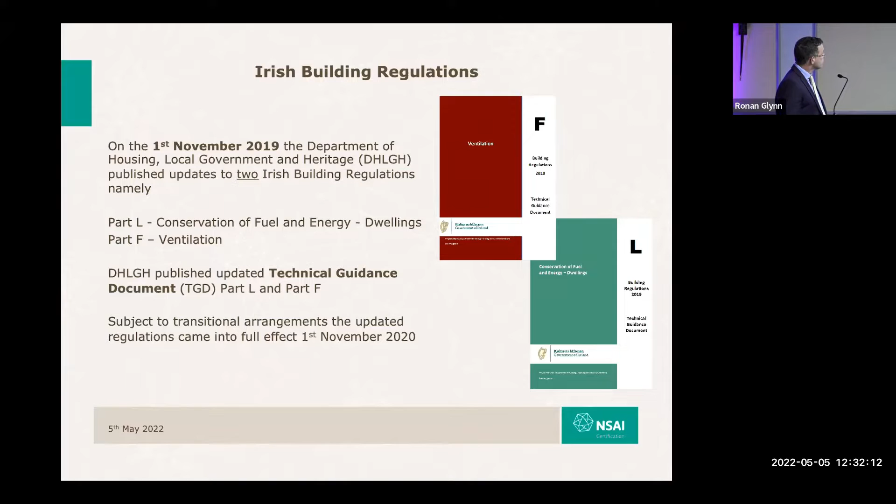Some of the impacts resulting from these updates to Part L and Part F: in Part L, typically all new dwellings were going to achieve an A2 BER or better. We introduced the renewable energy ratio. We've already spoken about the MPEPC and MPCPC targets. There were various improvements to elemental backstop U values, and the upper limit of air permeability was reduced from 7 down to 5.

The other important point to make is that all dwellings required an airtight test. There was no allowance anymore for the sampling that was permitted under the old regulations.

In terms of Part F, the air permeability index was brought down to 5 cubic meters per hour per meter squared. Dwellings that achieved an air permeability index below 3 could no longer consider natural ventilation as a possible strategy. This makes it very difficult for a designer to try to achieve a value between 3 and 5 when designing a building.

So it's a safer option to consider mechanical ventilation, and that's really what we're trying to encourage. To retrofit a mechanical ventilation system is not possible, it's not doable. In fact, we've had horror stories relayed to us where builders are going around cutting fabric to worsen their air tightness after deploying a natural ventilation strategy, which is just lunacy.

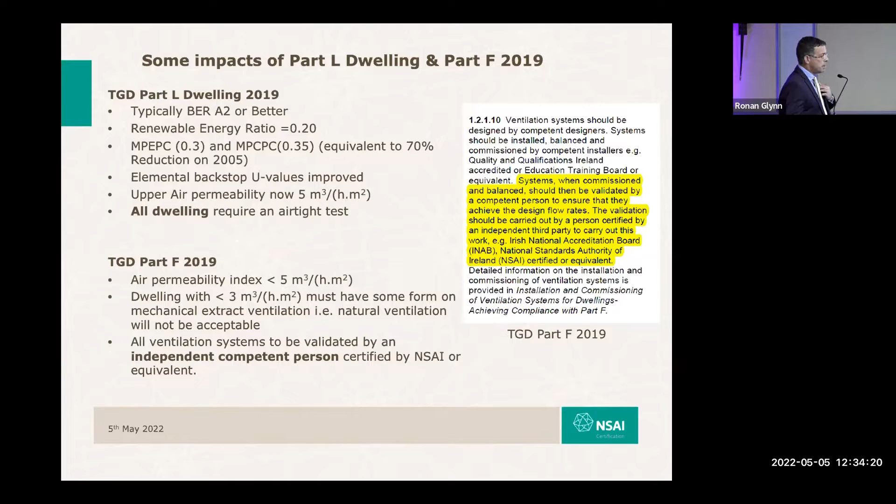So in Part F, they introduced a new requirement for an independent, competent third party to carry out a validation of a ventilation system.

Ventilation heat losses in housing consist of the undesigned leakage, covered under the airtight test, as Emmanuel has alluded to. We have in excess of 70 registered airtight testers, so there's a good supply in the market there.

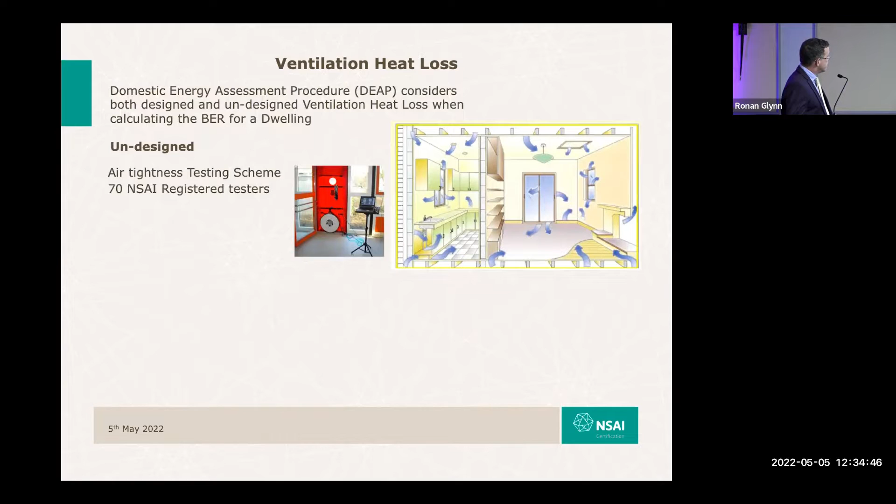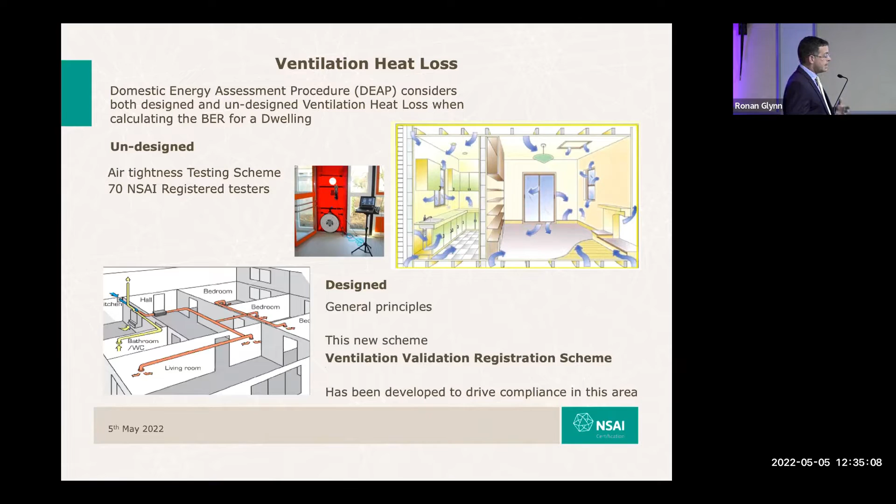Then we have the designed ventilation, and if it's a mechanical ventilation system, we supply air into what we term the habitable rooms, and we extract air from the wet rooms. So the Ventilation Validation Registration Scheme is an effort to drive compliance in this space.

We still have the capacity to accommodate natural ventilation, again just between the 3 and 5 air permeability index. Passive stack is another form of natural ventilation. Then we've got mechanical ventilation, either centralized extract or mechanical supply and extract ventilation. There's also demand control ventilation systems, which I'll talk about a little later on.

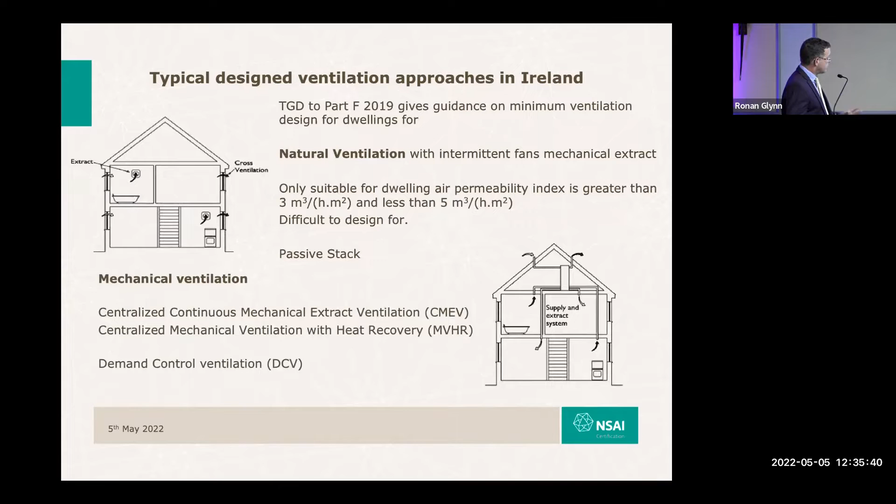So the scheme that we were tasked to develop by the department registers an individual as a competent person to go out and check and measure that a ventilation system, as installed, designed, and commissioned, meets Part F requirements.

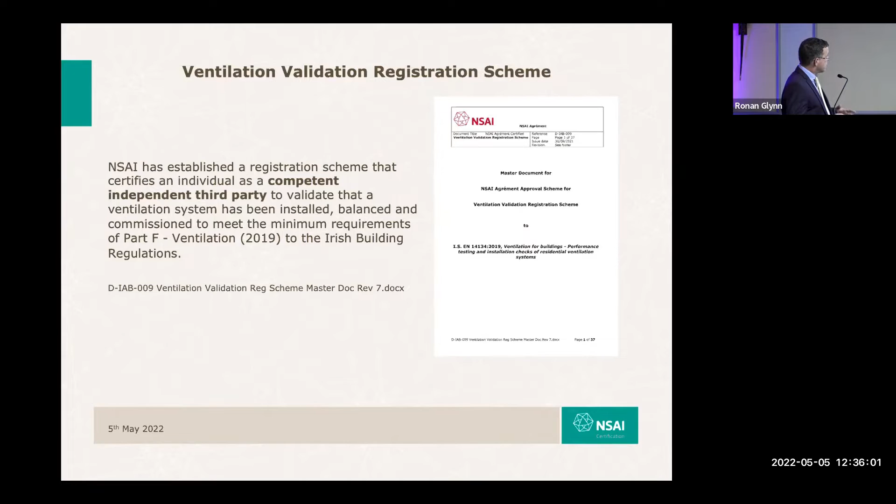To that end, we have our scheme document, and we draw upon I.S. EN 14134, the Department of Housing, Planning and Local Government's publication 'Installation and Commissioning of Ventilation Systems', and the BSRIA Domestic Ventilation Systems guide to measuring airflow.

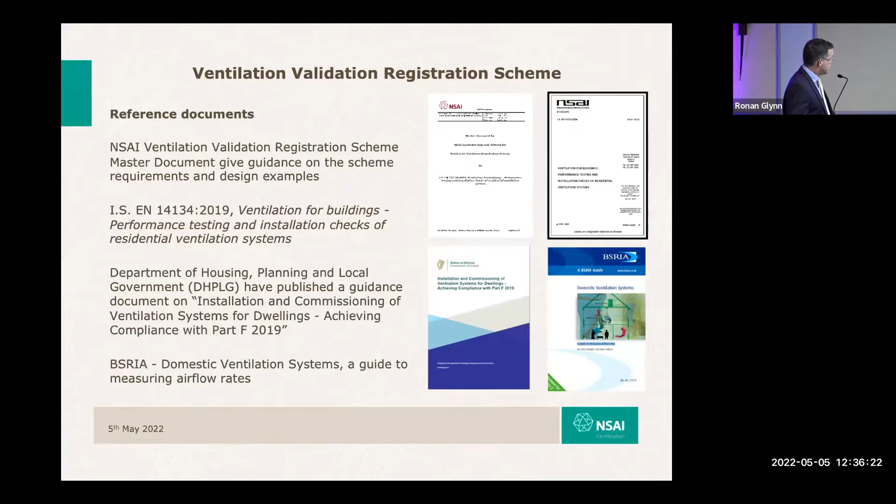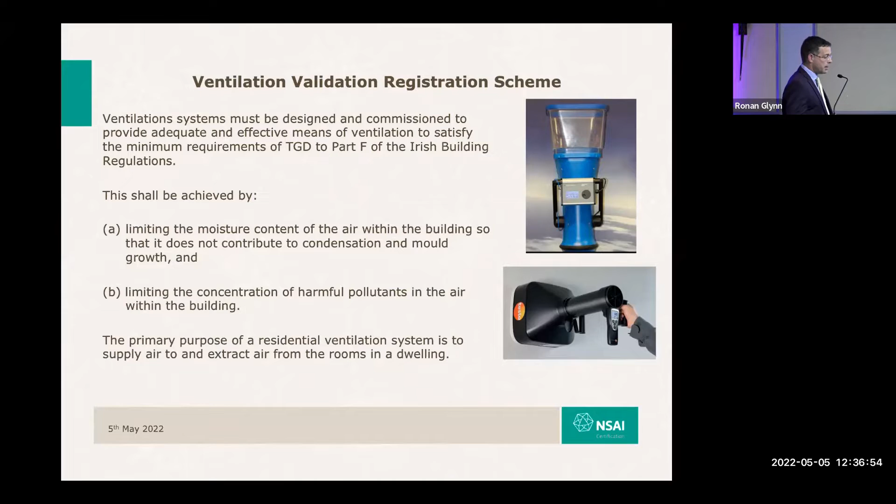Ventilation systems need to be installed and designed to meet Part F in order to limit moisture and the accumulation of harmful pollutants in the living space. After the last two years - and by the way, it's great to be here - post-COVID there couldn't be a greater focus on healthy indoor living spaces and air quality.

So the ventilation validator, when he arrives on site, will be presented with either a design for the ventilation system or a commissioning cert.

He's not the designer, he's not responsible for the design, but he is responsible to run the ruler over what he's been presented with, broadly speaking, in line with Part F. To that end, as we'll see later, he may need to do a ventilation design for that house just to satisfy himself that what's presented is fit for purpose.

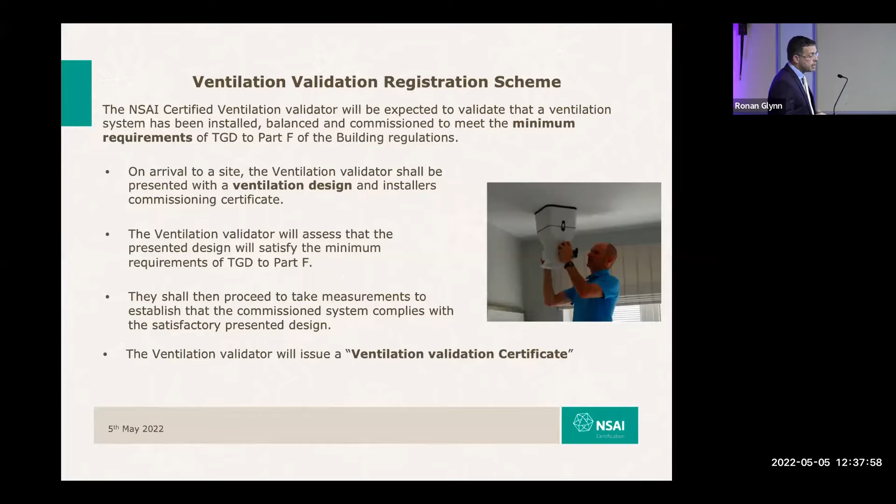Then he goes around and measures the flows, the supplies, the extracts, or in the case of a naturally ventilated house, he measures the number of OPEs, wall vents, and intermittent extracts in wet rooms and the like. Being satisfied with what he's inspected, he issues a ventilation validation certificate.

During the development of the scheme, everybody had an anemometer, the device used to measure flow rates. They had them calibrated with INAB or UKAS accredited calibration certs, but on the very first outing with 5, I think, would-be validators, we went into a dwelling and everybody read wildly different readings.

What became apparent to us is that despite the equipment being calibrated, they didn't know how to use the devices correctly. This ranged from not configuring their measuring devices properly to not using things called flow straighteners.

The typical devices available on the market to measure flow rates are either pressure compensating devices or anemometers with a vane anemometer. And if you've got a diffuser on a supply grill causing a vortex or a swirl, it will either overmeasure or undermeasure.

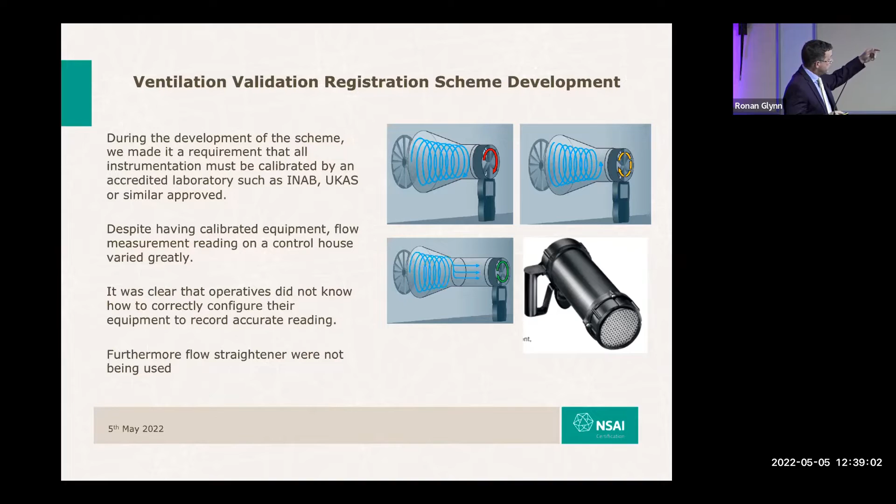So we had 5 devices all measuring in wildly different readings. With that, in conjunction with Lindab and Chris Halligan, we developed a proficiency unit, housed in WWETB, which provides supply and extract on 2 different lines with an inline UltraLink reader. Anybody who wants to apply as a validator needs to take 20 readings and satisfy us that they can use their device and measure within a very low tolerance, plus or minus 10%.

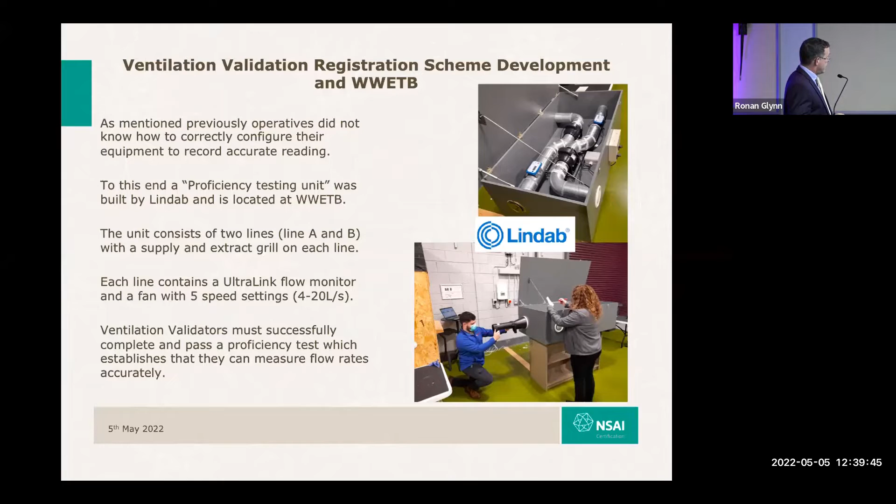That's given great reassurance to us that anybody who's on the register is capable of performing the function of validating a ventilation system. So let's consider a house.

A typical 3-bedroom house, 122 square meters, 2.4 floor to ceiling. I'm not going to go into all the detail on how one designs ventilation systems. If you want information on that, go to the WWETB training course where they run through how one designs ventilation systems. In general, it consists of an occupancy rule and a square meter rule, and we work out and establish a general ventilation rate for a whole dwelling.

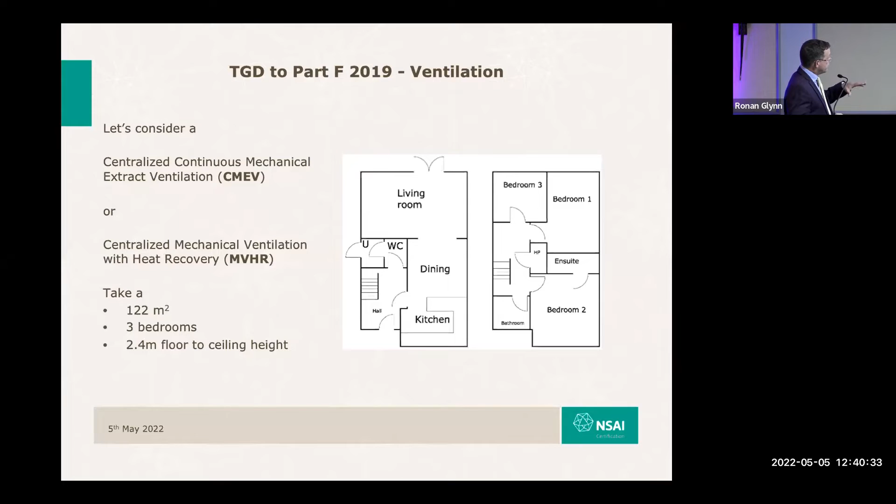We then redistribute that in the volume of the habitable rooms, and we balance that with the extract. So a system supplying, say, 39 litres needs to extract 39 litres to be balanced, and that's the general principle: we supply to habitable rooms and extract from the wet rooms.

Which I will go on to later, relays the importance of undercut doors for there to be a satisfactory and free-flowing, working ventilation system.

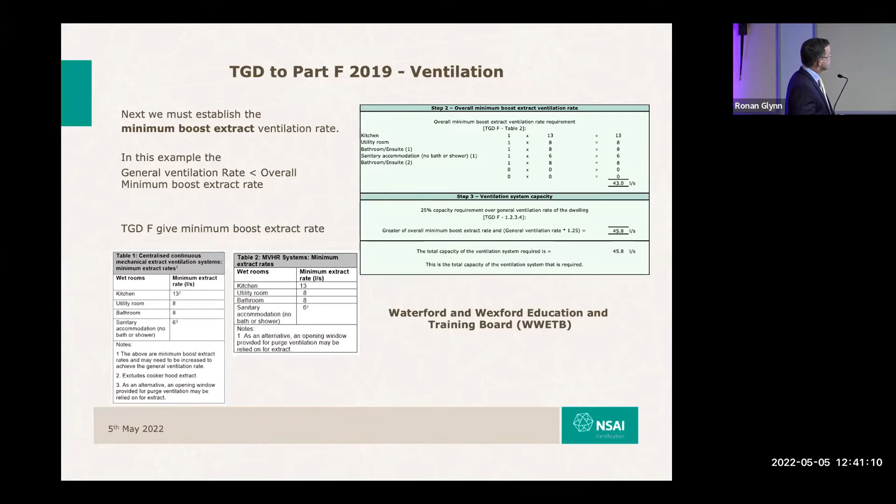There's a boost requirement then when wet rooms are being used, that the system can go into boost and extract moisture-laden air at a greater rate, to regulate and limit humidity buildup, which in turn could give rise to surface condensation occurring and mold growth in an unhealthy living environment.

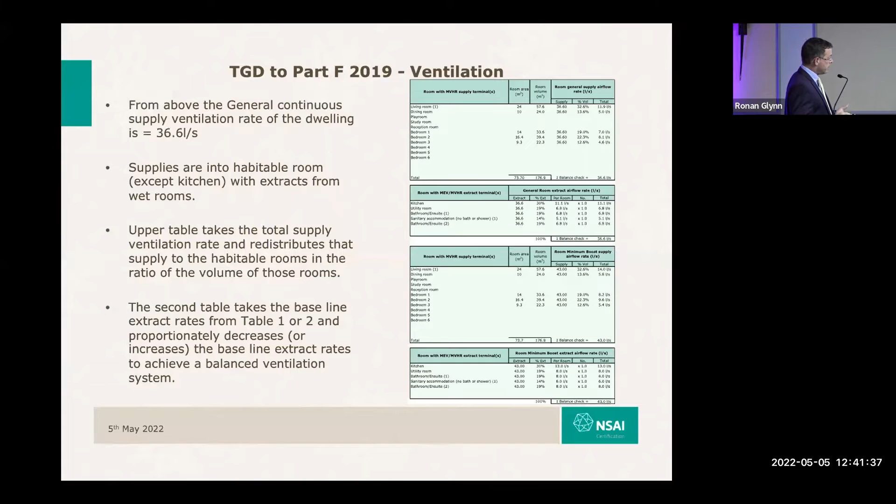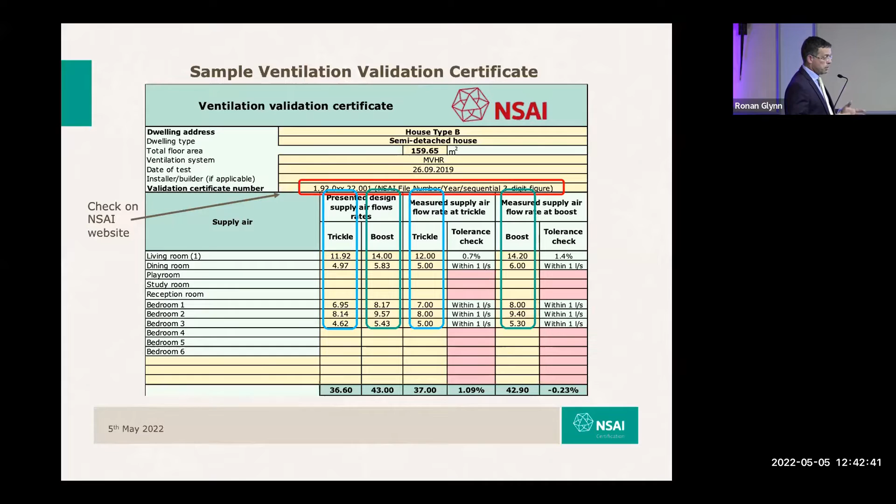So it was important, and I think the department wanted to ensure that it was not removing the obligation on designers of ventilation systems, that validators would just come in and pick up the tab and be the responsible party. They're not responsible for the design, but they are responsible for offering an opinion or a comment on whether the design was fit for purpose.

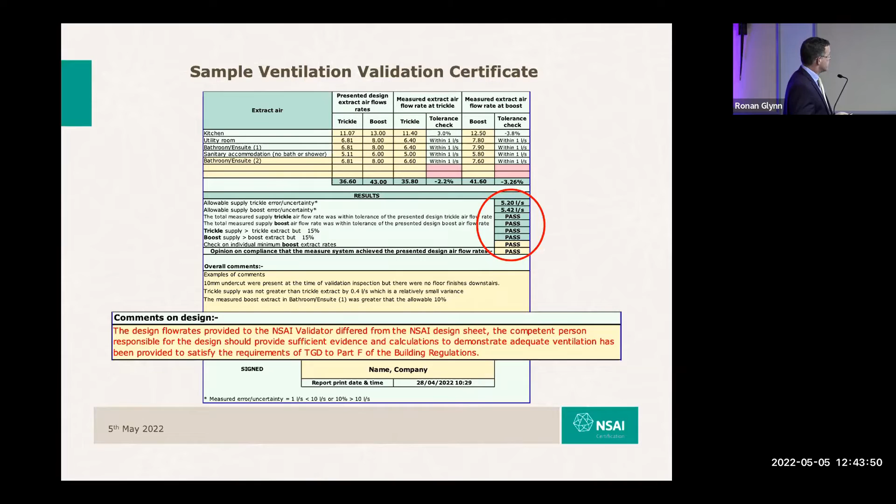So demand control ventilation, I said earlier, is a possible option. These systems operate on the basis that they ramp up in times of spikes in humidity, generally when there are lots of occupants in the room. They have a moisture-sensitive strip in their supply grills or extract grills, and these strips expand so ventilation rates increase in times of high occupancy.

Demand control systems that wish to operate sub minimum ventilation rates of technical guidance document Part F will require an agreement certificate, which assesses the suitability of the system to perform sub Part F levels. There's a process agreed with NSAI on how they can check those systems by measuring pressure differential.

Any other demand control system out there that has been installed that does not have an agreement certificate, in our opinion, at their minimum setting, should achieve the minimum requirements of Part F.

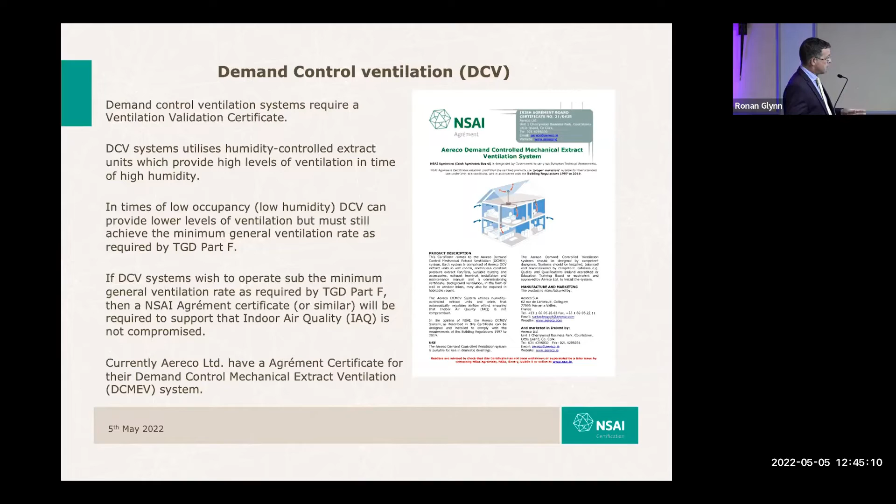So what to check? We've said it before, but I'll repeat it: first, the airtight test report. Where is it, what's the value? Is it below 5? If below 3, only a mechanical ventilation strategy is suitable for the dwelling; natural ventilation is not satisfactory.

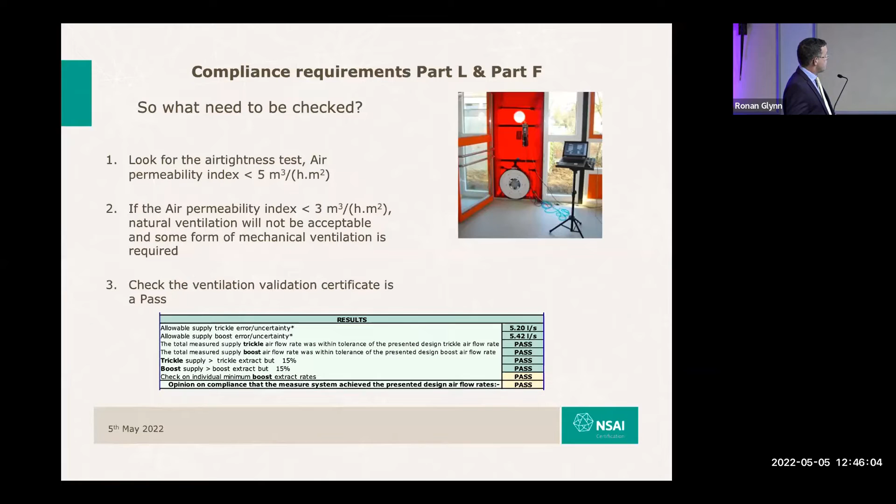And the final part of the jigsaw: is there a validation ventilation certificate contained within the BCAR pack that demonstrates that the system has been checked by an independent third party and that it passes the checking? And that's effectively my presentation.